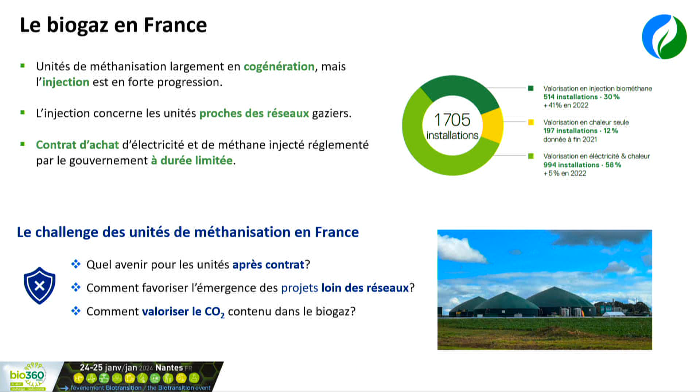Dans ce contexte-là, on va parler chiffres pour voir comment s'inscrit la solution ENERGO pour la méthanisation. Les chiffres que je vais présenter sont basés sur des hypothèses fixes, de manière à pouvoir comparer des choses comparables. On part d'une unité qui produit 200 normaux mètres cubes de biogaz par heure, donc 60-40.

Sur ces 200 normaux mètres cubes par heure de biogaz, la première option, c'est de faire de la cogénération. On part sur l'hypothèse de 435 kW, une efficacité de moteur à 33% et un tarif de vente d'électricité à 200 € du mégawatt. Avec ces hypothèses, on est à peu près à 0,74 millions d'euros par an de chiffre d'affaires pour ce business model cogénération.

Si on prend la même unité qui fait toujours 200 normaux mètres cubes par heure de biogaz en injection, on part sur un tarif de vente de biométhane de 100 € le mégawattheure. Là on est plutôt sur 1,1 million d'euros de chiffre d'affaires.

Nous, dans ce contexte-là, on propose une troisième solution, à savoir la production de biocarburants, donc deux types de molécules : du biométhanol dans une première phase et du SAF, à savoir du kérosène à destination de l'aviation durable.

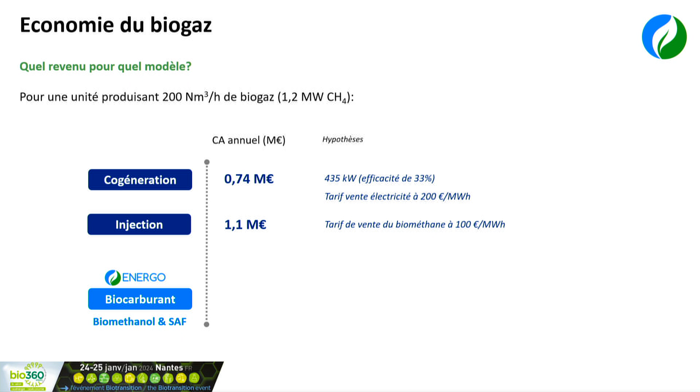Quelles sont les hypothèses derrière cela ? On va venir traiter directement le biogaz brut, donc le mélange de CH4, méthane, et de CO2, brut avant épuration. On va le valoriser directement et produire dans un premier temps du biométhanol.

Le biométhanol, c'est un marché en forte demande, entre 1 200 € et 1 300 € la tonne. Dans un deuxième temps, on transforme ce biométhanol en kérosène, qui se vend à 3 000 € la tonne. Avec ces hypothèses, on est sur un chiffre d'affaires allant de 2,4 à 2,9 millions d'euros.

On voit qu'on fait plus du double par rapport au business model cogénération, voire l'injection.

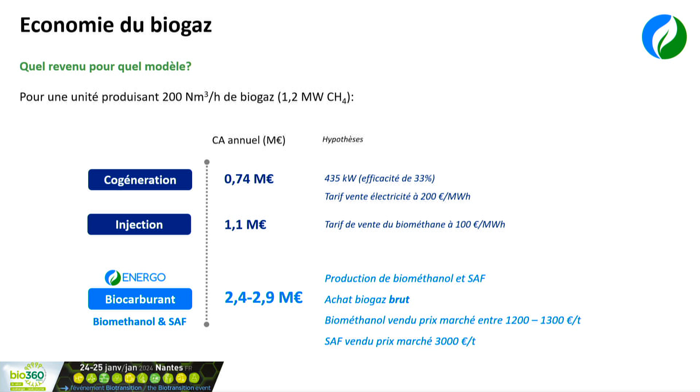Alors comment on fait ça ? Première étape, on va valoriser le biogaz sur site directement. On positionne notre conteneur et on vient, dans une première étape, transformer le biogaz en syngas par une brique de réformage à sec. On produit un syngas qui est un mélange de CO et d'hydrogène.

Dans un deuxième réacteur, on prend ce syngas et, via une brique de méthanolation, la même technologie ENERGO, on vient produire du méthanol. Ce méthanol est transporté dans la région, sur une distance inférieure à 150 km, pour limiter l'impact des gaz à effet de serre liés au transport.

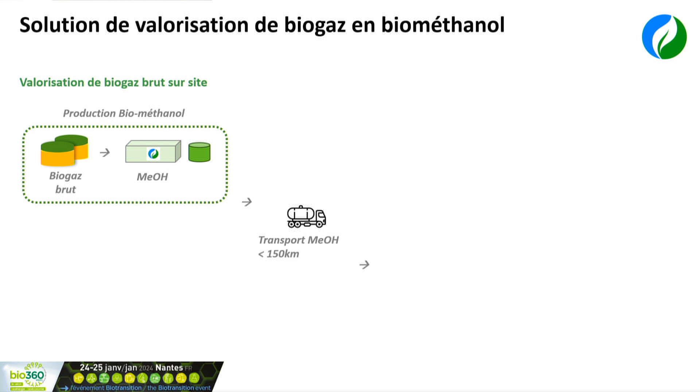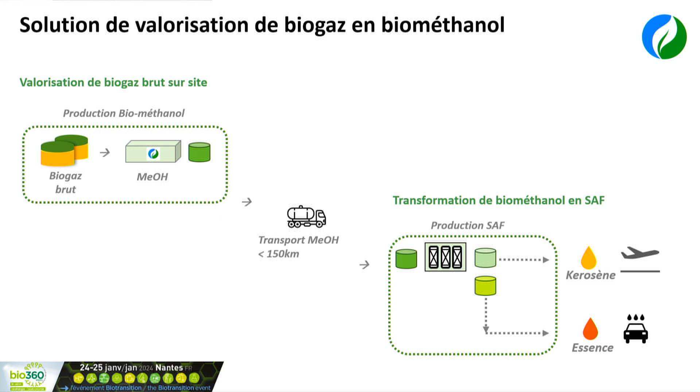Il va ensuite être transformé, dans une deuxième étape, dans une unité qui permet de convertir le méthanol en kérosène. On produit du kérosène, mais aussi de l'essence, un sous-produit qui peut être tout à fait valorisé. C'est également une essence d'origine biologique.

Comment on se propose de déployer cette technologie ? Première étape, on va implanter des conteneurs ENERGO sur le territoire, directement sur les sites de méthanisation agricole, au plus proche des cuves. C'est une technologie simple d'utilisation, avec une forte rentabilité, et ça permet finalement de produire un produit déjà fini.

Aujourd'hui, le marché du biométhanol, ça a été mentionné ce matin, est énorme : 500 millions de tonnes dans le monde. En France, 100% du méthanol consommé est importé et surtout d'origine fossile. Donc le marché est juste énorme.

Qui va acheter le méthanol ? Premièrement, les utilisateurs historiques, les chimistes, parce que le méthanol est le premier alcool, avec un seul atome de carbone. C'est vraiment une molécule plateforme qui sert à produire plein de produits chimiques, et sert également dans tout ce qui est solvant. C'est un intermédiaire, et aussi un vecteur très important pour la décarbonation du secteur maritime.

Il y a des présentations très intéressantes qui ont été faites là-dessus ce matin. Finalement, avec un conteneur, on va déjà produire un produit fini avec un marché qui existe déjà.

Deuxième étape, on va créer des écosystèmes régionaux de production de biométhanol : plein de petits conteneurs sur différents sites de méthanisation, de manière à avoir une capacité de production de méthanol suffisante pour ensuite valoriser toute cette production dans une usine centralisée de conversion de biométhanol en kérosène. Ça va vraiment se faire en plusieurs étapes.

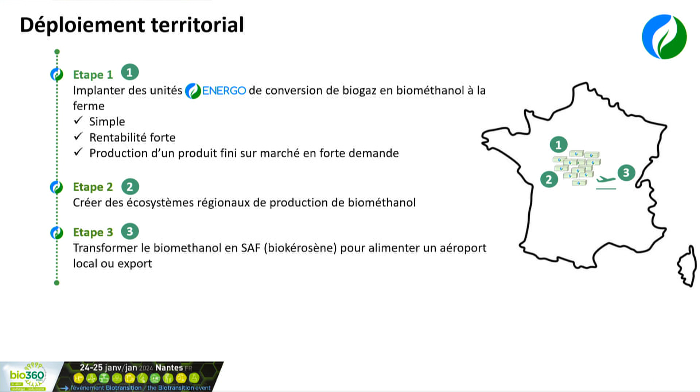Comment on imagine ça ? C'est en réflexion. Ce qu'on imagine, c'est finalement se caler sur le système que les exploitants connaissent déjà, à savoir une coopérative, mais une coopérative d'énergie verte. L'idée, c'est vraiment d'impliquer l'exploitant dans l'actionnariat de la société Biogaz-to-méthanol, et dans un deuxième temps, société Biogaz-to-SAF. Premièrement, pourquoi ? Pour réduire les risques marchés.

En cas de fluctuation du marché du méthanol, aujourd'hui il est à 1 300 € la tonne, c'est super. On verra dans les années qui arrivent.

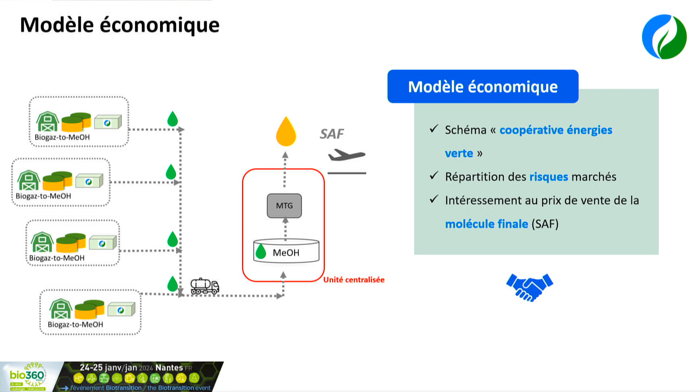Je pense qu'effectivement, aujourd'hui, les projets de e-méthanol ne sont pas prêts d'arriver tout de suite, donc on a quand même le temps de voir venir. Il y a également la fluctuation du prix du kérosène, donc ça va permettre de répartir le risque marché sur l'ensemble des acteurs du projet. Mais surtout, ça permet également d'intéresser les exploitants à la revente du prix, à la revente de la molécule finale, à savoir le biométhanol ou le kérosène. Donc on est en train de réfléchir à ça pour justement trouver le meilleur fonctionnement, la meilleure rentabilité pour tous les partenaires du projet.

Concrètement, où en sommes-nous aujourd'hui. L'année passée, nous avons conçu un démonstrateur, biogaz to méthanol, qui est en mesure de traiter 20 normomètres cubes par heure en entrée de biogaz. Nous avons finalisé sa construction et il va être installé au premier semestre de cette année dans notre hall d'essai situé à Lille. Donc courant 2024, on va déjà le démarrer dans notre hall d'essai, valider l'opération, optimiser aussi, valider les performances de rendement, la stabilité d'opération. Et après, ce conteneur va être déplacé sur différents sites industriels pour finalement valider les performances en conditions réelles. Ça va être sur une unité de méthanisation agricole, mais également sur d'autres typologies de producteurs de biogaz, parce que le biogaz issu de méthanisation agricole est encore différent d'un biogaz issu de step ou issu de décharge. Donc l'idée, c'est vraiment de valider la performance du procédé sur toutes les typologies de biogaz sur 2024.

L'objectif, en 2025, c'est de lancer notre première unité industrielle. Pour l'instant, le débit n'est pas encore fixé, mais on va viser peut-être 200 normomètres cubes par heure, ce qui est tout à fait cohérent avec l'écosystème biogaz. J'ai mentionné en début de présentation que nous avons finalisé une levée de fonds en décembre de 12 millions d'euros. Cette levée de fonds vise également à investir dans notre premier outil industriel. Donc nous sommes à la recherche de partenaires sur le sujet.

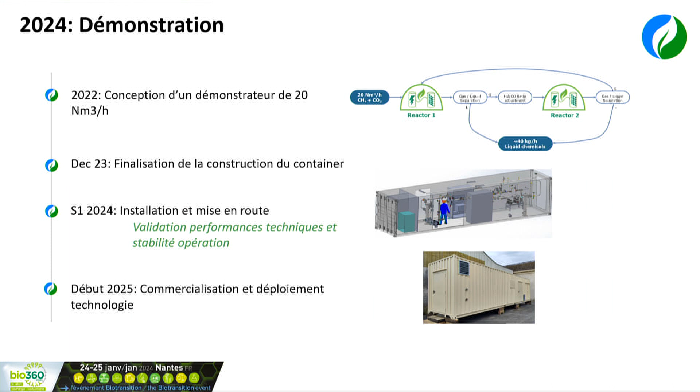Bon, merci beaucoup, Marion. Est-ce que... monsieur, ici, s'il vous plaît, le microphone.

Bonjour. À partir du moment où on est lancé dans une méthanisation avec injection, est-ce que de manière réversible on peut avancer vers votre système de production de kérosène?

Alors, c'est une question qu'on est en train de creuser, parce que justement les méthanisations que l'on cible, on est en train de se poser la question. Si effectivement en fin de contrat de cogénération, on se pose la question de l'injection, parce qu'aujourd'hui il y a des méthaniseurs qui nous contactent, qui veulent augmenter en capacité, qui veulent continuer à injecter, et du coup l'augmentation de capacité voudrait potentiellement dédier ce biogaz à la production de méthanol. Ça, ce n'est pas encore validé. On n'est pas encore sûr qu'ils puissent consacrer une partie de la production à une nouvelle voie de valorisation. Alors pour ce qui est de changer complètement, si vous faites de l'injection, je crois que vous êtes obligé via le contrat d'assurer jusqu'au bout.

Là aujourd'hui, par exemple, pour les contrats en fin de cogénération, on est en train de regarder ça également, parce qu'il y a différentes typologies de contrats. Il y a certains contrats qui sont peut-être plus faciles à casser que d'autres. Il y en a certains où finalement la pénalité liée à la rupture du contrat est trop importante, et à ce moment-là ce n'est pas rentable pour le projet de faire ça. Donc c'est quelque chose qu'on est en train d'étudier. Aujourd'hui, on n'a pas encore les réponses. Et c'est aussi un travail qu'on doit mener avec les méthaniseurs. Parce que de ce que j'ai compris, c'est qu'à chaque méthanisation correspond un contrat, des conditions générales, et on ne peut pas faire de règles générales pour toutes les méthanisations.

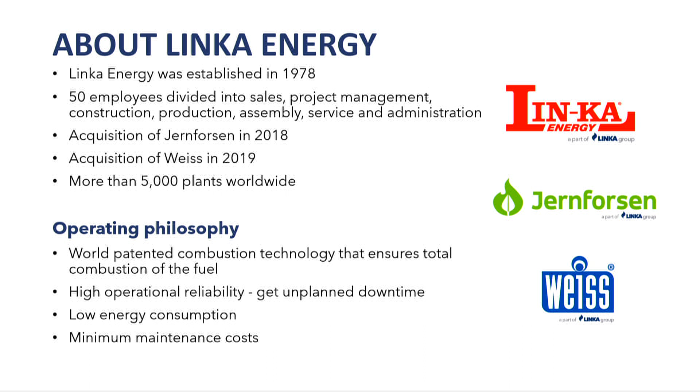I'll make a short presentation of the company and talk about straw to biogas. We can deliver biomass boilers from 250 kilowatts up to 30 megawatts, so we can produce high pressure steam or just hot water. A lot of biogas companies are using the high pressure boilers for upgrades, if it's an amine solution, for example.

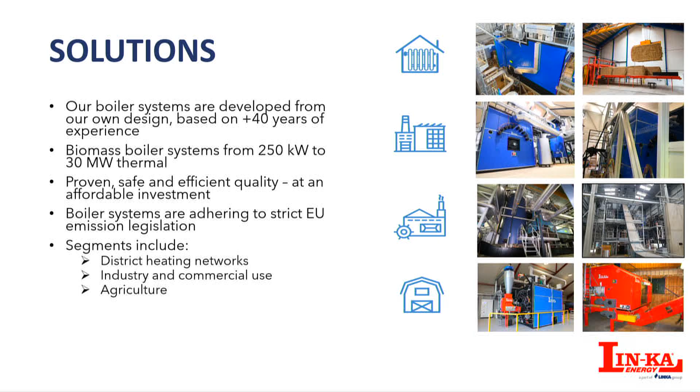We can use all kinds of biomass. We just delivered 2 boilers for Japan that can burn rice husk. So whatever kind of biofuel you've got, we can burn it.

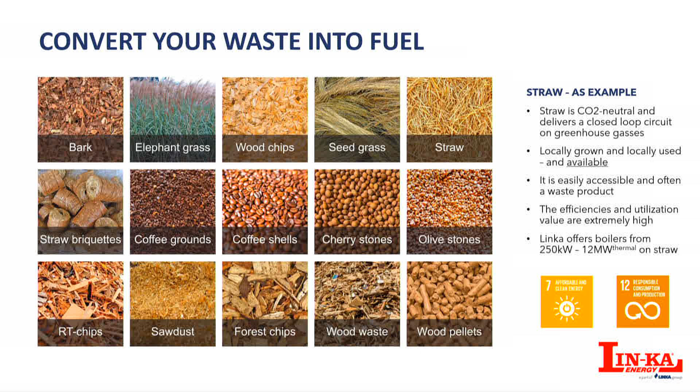So to the straw to biogas - from 2025 it's not allowed to use corn or maize in biogas production, so you have to find an alternative, and we think that straw could be a good solution for that.

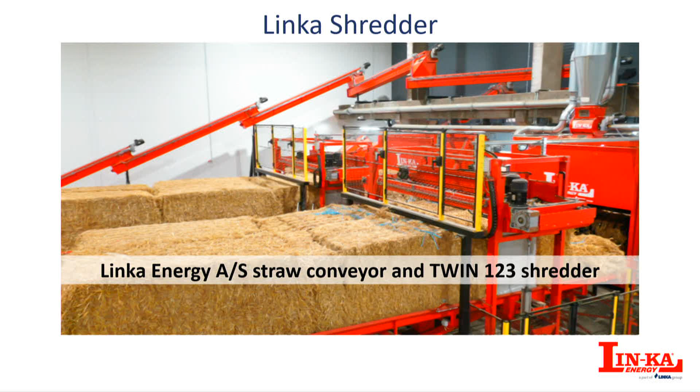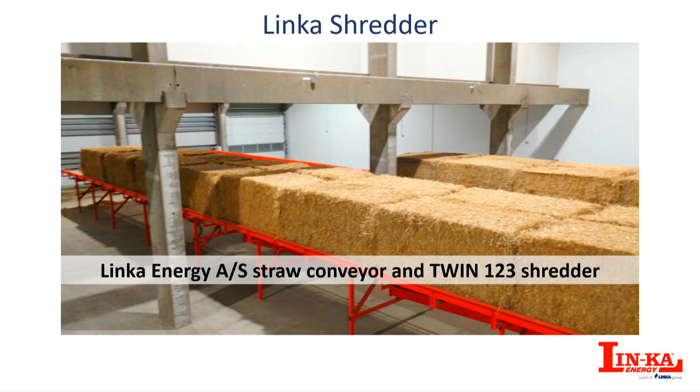But if you put straw in a reactor tank, it's hard to mix. So we have this shredder we've used for our boilers for many years, where it can shred this straw up to 8 to 10 centimeters, and also rips it open.

You can see here how it works. There's a knife on these rolls, and it will chop the straw into small pieces. Then we made this cooperation with a company called Euromilling in Denmark, also a very old company with a lot of experience. They produce hammer mills.

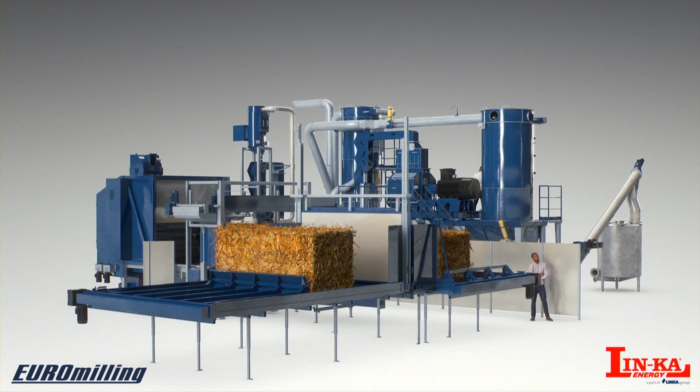So this is a plant from Denmark, from Nature Energy. We start with the straw that's in an isolated room. There's a fire wall between, and the straw comes in on a conveyor and into the shredder.

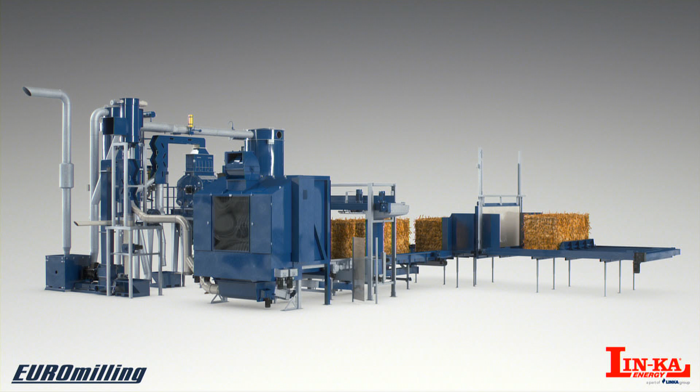After the shredder, it will be vacuum sucked into the first hammer mill. It's a pre-mill where it gets down to around 2.5 millimeters. In this process, it also opens the straw.

All of this is, of course, very safe. There's fire protection everywhere, both with water, and it shuts off and completely closes the system if there are any sparks. To prevent sparks in a hammer mill - if there are stones in it, there will come sparks, and that's a bad situation in this case.

So there are a lot of stone traps in this system, for example, where all the straw is sucked up, so only the light materials go up and all the heavy stuff goes to the bottom. In that way, we can avoid getting nails and whatever stones into the system.

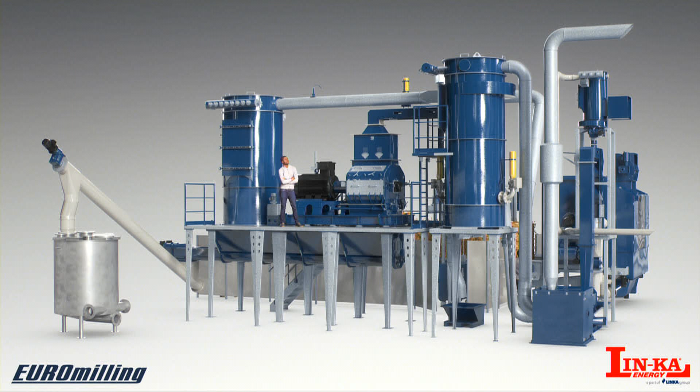After it has been through the first hammer mill, it gets to a much smaller hammer mill where it comes down to pieces between 1 and 3 millimeters. So it's very small, and it's open on the side, so it's easy for the bacteria to get in to work with the straw.

We'll take it over to the mixer tank, where it will be mixed with the manure, and then injected into the reactor tank. In this way, there will be a much bigger, faster process than if you just put it in whole bales.

Here is the drawing of the system. It looks big, but it's not that big. It's about 10 by 13 meters, and it can be compressed in whatever area it is.

This is still a pretty new technology, but the interest for it is very big. Right now we are testing to find out exactly how much it can produce, because if we ask a biogas company that already makes this, they'll just say we put a lot of other things in it - so there's a lot of shifts, different recipes. So we are waiting for the test results. I think we'll get them within the next two months or so.

This is the second plant we have built in Denmark, and we already have requests from here in France, but also Germany and Spain, and Ukraine is also very interested in biogas. So I think there's a bright future for straw in biogas - again, you have to find an alternative for corn or maize.

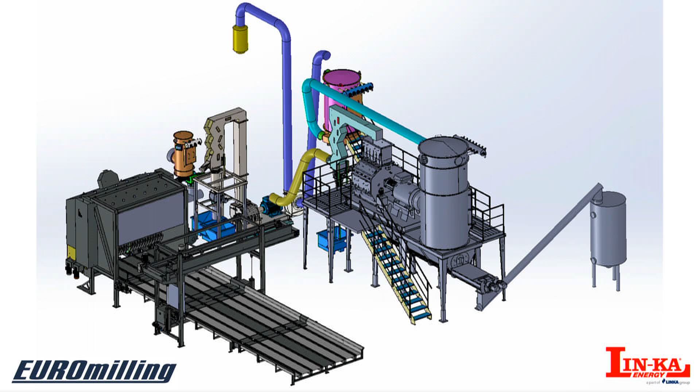This is a short presentation. I also have to go to a panel discussion afterwards, so we have to keep it short. But any questions?

I've just got one quick question - so you say this is innovation, so it's new to market, and you have one unit, the second one in Denmark? Yeah, the second one is testing right now to see how much we can produce, and the one I showed can produce 4 tons an hour.

And you said you've got results coming back from the process - laboratory testing it, so we can get the right numbers for it. And for someone who's interested in getting the results, will they be published on your website? Yeah, they'll be published on the website in 1 to 2 months.

Some like to use it in briquettes instead of just injecting it in small pieces. So that's also a possibility - after it's been through the hammer mill, to compress it into bricks and put that in. But it depends on who's making the recipe - some like one thing and some like the other. Okay, so you have both possibilities. Yeah, there's several possibilities.

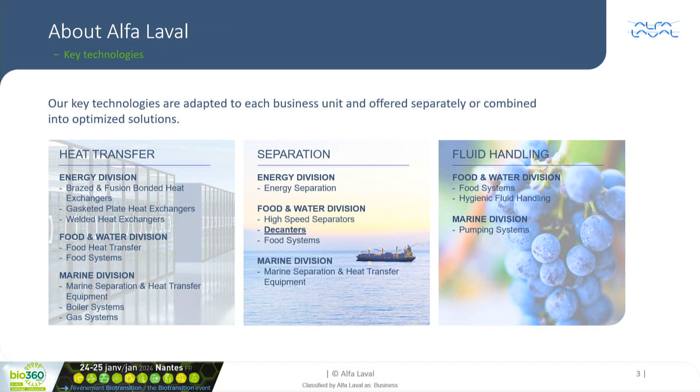I'll give the word to Lee so he can present Bisviridi before going more into detail about the solution. Good afternoon everybody, thank you very much for having us here today. As Matteo said, we are an anaerobic digestion operator - we have in total 10 businesses operating in the UK, 7 of which are processing food waste.

One of our key drivers was to diversify our revenue streams. Many of you here probably know that our key revenue streams in biogas are either selling biogas to the grid or electricity through CHP. In both cases, we're very much as an industry a price taker, and we're also generally receiving a subsidy which will have a day where it finishes. So our aim was to diversify our revenue streams.

We've been operating since 2012, and we're processing around 550 to 600,000 tons of food waste per annum through our facilities. Together with Alfa Laval, we've been developing this process to separate out the oil in the feedstock that comes into our facilities, to monetize that by selling it into either the biodiesel or SAF markets.

Last year we successfully separated around 3,000 tons, and we actually saw an increase in benefit to that. So let's assume for a second that we didn't replace that feedstock, and we produced less gas as a result of separating the oil. The net revenue stream to us was actually higher than it would have been if we'd just let it continue through and converted it into biogas.

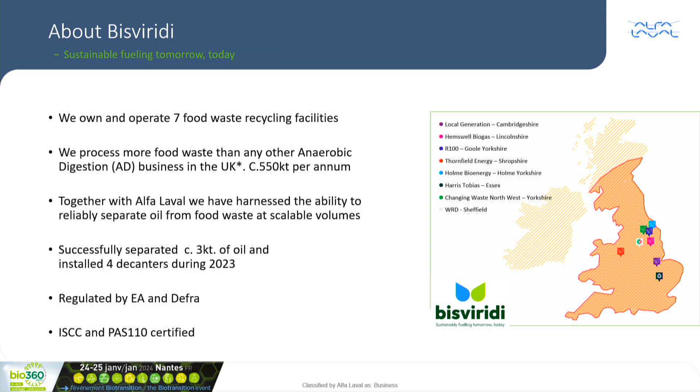Over the years, because this is a completely new project and not been seen before, we don't think worldwide, getting accreditations etc. was tricky. So over the last 18 months, we've managed to have the Environment Agency sign off on the project, and also ISCC accreditation, which makes a big difference in the sale price. We've overcome those hurdles now, and we'll talk a bit more about the detail of it.

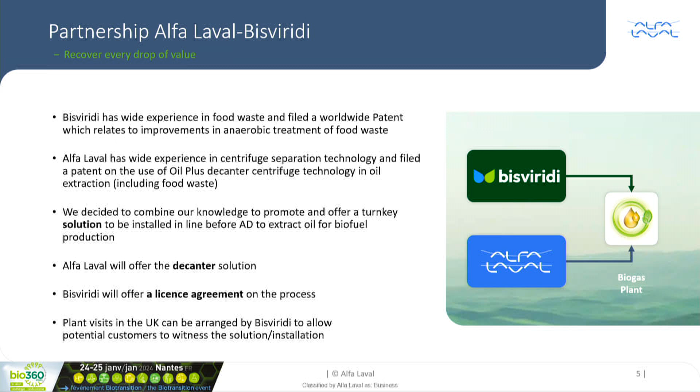So let's go. What is the background behind this idea? Yeah,

In terms of its scalability, if we look at food waste across the globe, there's around 2.5 billion tons of food waste being produced. Over the last 4 years, we've also come to realize that there's an increasing value in inedible oils in various different shapes and sizes, various different formats. So be that sale into SAF, which seems to be the highest increase at the moment, or biodiesel, or a number of other options. At the moment, no AD plant is currently separating that oil out. There's 2.5 billion tons, and this just shows you the scalability of the project. It really is the ability for both the biogas producer as well as the off-takers who are in high demand for the UCO, used cooking oils. It's got real large potential to benefit both the off-takers and the biogas industry.

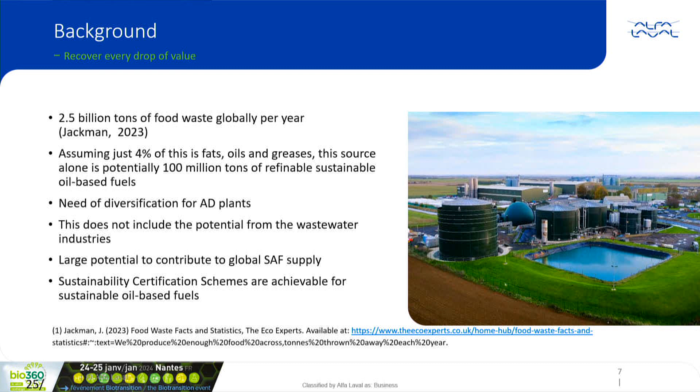But let's go a little bit more in detail about what we are selling. What is the equipment? Because we created a skid with a decanter mounted on the skid with all auxiliaries already. It's a plug-and-play unit where you can connect the stream of your feedstock in the food waste, and the feedstock enters into the decanter.

The decanter is a specific decanter called Oil Plus. This machine has been designed to remove oil from any oily feed. So we applied this technology in this specific application, and with success, because it works like a skimmer. We just remove the oil, and on the outlet, from one side you get clean oil, very clean. We can reach a purity of 99.5%, and we can recover up to 100% of the free oil in the feedstock. On the other side, on the outlet, you get a wet slurry that can be pumped straight away back to the system. And this is the big advantage, because with small supervision and really simple use, you can simply remove the oil and send everything back to your system.

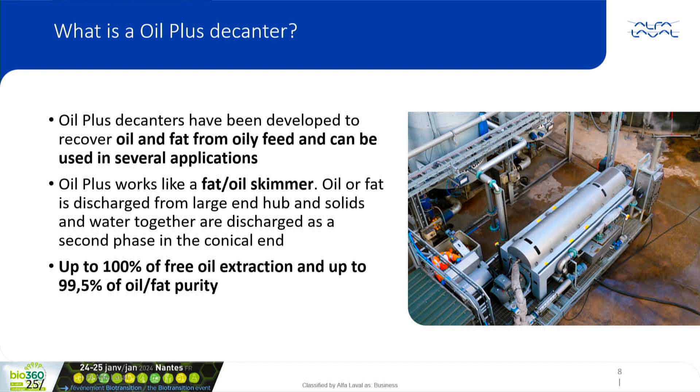And where we play—I'll give the word to Harry to be a little bit more in detail about the process itself—but the position of the decanter is inside the AD plant, after the hydrolysis or after pasteurization, and before the anaerobic digester. So we take the stream, we remove the oil, and we send back the rest inside the system.

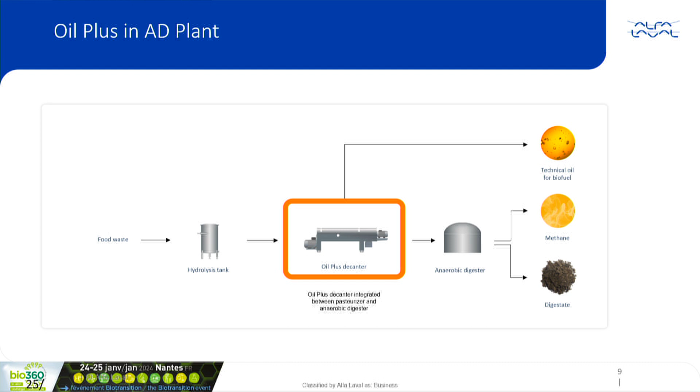So as has already been said, the process involves taking AD feedstock, be it food waste or any organic material that has a fats, oil and grease content, as the industry terms it. But we're looking for that free oil fraction, so we take that material out of the process and put it into the Alfa Laval centrifuge. The centrifuge is able to cleanly separate that fats, oil and grease fraction from the remaining liquid and solid fraction. Whilst the machine is collecting the oil fraction, it's simultaneously recombining the solids and liquids, and it sends it back into the AD system exactly at the point where you took it out. So it's a very effective system.

Now, fundamentally, irrespective of the physical differences that exist in anaerobic digestion sites, whether it's pre or post digestion pasteurization, these are the 4 fundamental stages: hydrolysis, acidogenesis, acetogenesis, methanogenesis. It's important that this process gets installed somewhere prior to methanogenesis, because prior to that there's the best opportunity to collect all of the oil that was in that feedstock originally, as well as a higher chance of it being more acidic.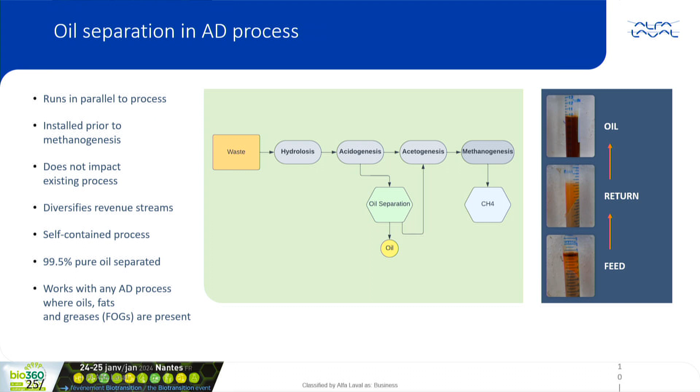So as Matteo's already alluded to, we have a skid, just one unit, which does everything you need it to do. The skid is about 3 meters wide and 9 meters in length, roughly the size of this stage for those that can see it. On that, you get the centrifuge, the control panel, the pumps, the flow meters - everything you need to safely and effectively separate the oil from the organic waste.

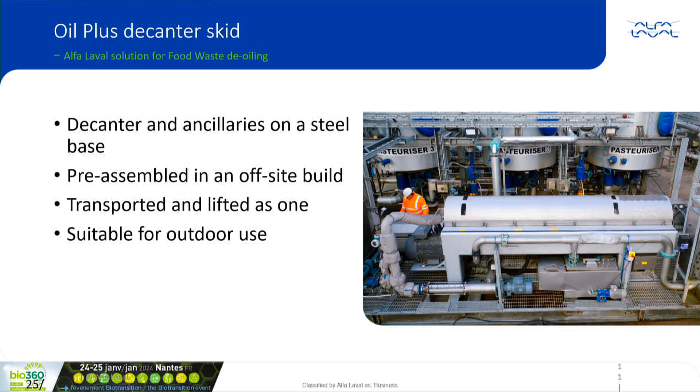So we have 4 active case studies of this so far, all very successful. And the product, the oil at the end, the properties look something like this: we see an M&I, moisture and impurities, of 99.5% purity, which is really good. The refineries and the buyers, that's really good for them.

The FFA, that stands for free fatty acids - that will vary depending on what the feedstock is, but for us in food waste, what we've seen is something like 15 to 20%, which again for the refineries and the buyers hasn't been a problem.

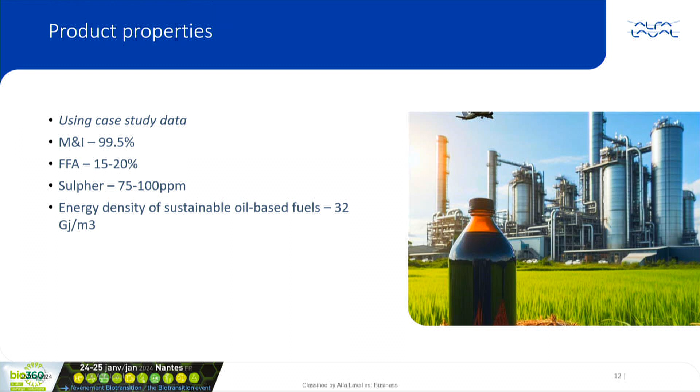The big winner is the energy density. The energy density of the oil we've been taking off the food waste, the raw material, sits somewhere around 32 gigajoules per meters cubed. So what that actually means is when it gets refined into biodiesel or sustainable aviation fuel, by the time it's been refined, it's very close to the conventional fossil fuel-based alternative. So the potential for the actual material to be turned into biofuels and used to do the same amount of work as fossil fuel alternatives - it's brilliant.

It's really good. I'm going to hand to Lee to talk more about the commercial side.

So, of course, any project needs to be commercially viable, and that was very important. I've tried to set this out and explain it to you how it looks financially. So there's a number of assumptions here. I've assumed that the AD plant is processing 80,000 tons of food waste, so quite a large installation - it's an average size for UK installations.

I've also assumed that there's 7% oil in the incoming material - that's the percentage we've been working to on average on our current case study installations. We've also taken a high gas price from 2022, because I wanted to assume if I'm not producing as much gas, I'm losing a high gas price. And I've also assumed a low oil price - so what I'm removing is at a high price, and what I'm selling at is at the lowest price within that time window. I've also assumed all operational costs, including manpower, electricity, water usage, etc.

Everything was covered within that. Now, it's worth taking a moment to remember that any AD plant is capped, either at the grid connection of the gas line, or the grid connection of the electrical connection. So we're only able to produce that amount of material, that amount of energy. So you have two options really: you either produce less, or you feed more to bring your gas production back up to your capped capacities.

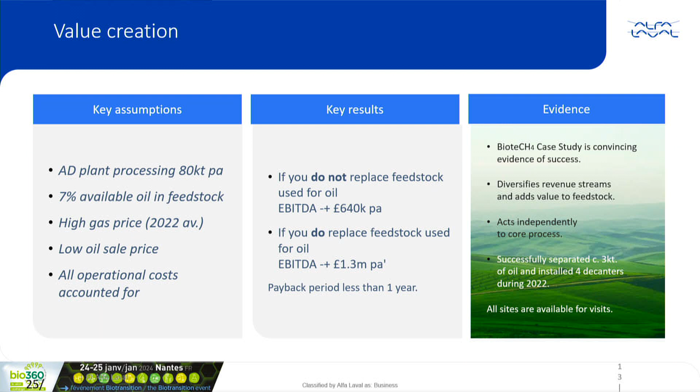It's a really strong case because not only was it more advantageous financially, but it gave us more control over our outputs. I have much more negotiation with a product that is in high demand and low supply than I do providing biogas or electricity to the grids. The way I see this going in the future is that will only increase.

So in conclusion, we've now proven this technology. It's now ready to go commercially to market. We've patented the process, so we're able to install it into other people's AD plants. It's a great way of diversifying your outputs. It's available for any AD process that has the presence of fats, oils, and greases. We just so happen to use food waste. However, we're looking at other types of AD processes where there are a presence of fats, oils, and greases.

Another point just to finish on is that critically, it's able to be verified as sustainable. And so the off-takers that are looking to use this material to then further refine it into SAF or biodiesel are able to get their green credentials on the back of it. It's very, very important. It increases the value substantially.